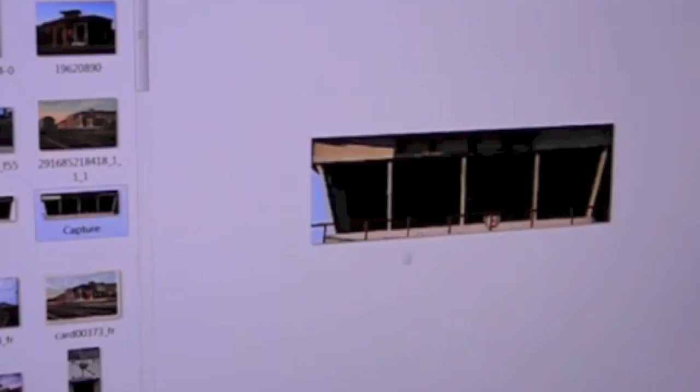And this is the original photograph. And here's one that I modified slightly using a photo edit software package, where I removed that railing.

I don't believe this is corrected yet for skew. Well, yeah, maybe it will. I think I'm shooting it on an angle here off of my camera, so it makes it look like it's not square, but it is.

And then I use this again to paste into my program to actually do the design page.

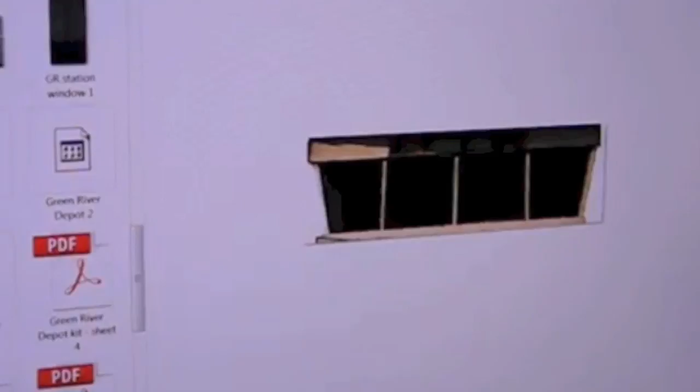Now I'm going to show you some of the pages that I designed using these components. So here I have a window, for instance, and I plugged that into my design screen.

Let's see if I can bring that up here for you. I have a program called Model Builder. It's from Evan Designs. And this is what the design screen looks like when you start out.

You tell it you want a new project, or you can open save files. You put the scale in here, in this case N scale, 1/160th.

Now I'm going to tell it to open a saved file. Okay, so I'm going to open a save file.

Saved in the Model Builder, of course. I have a lot of files in here, a lot of designs that I've done. Here's a little store that I designed, called 10 Point Bob's. I'll open that. Now this is obviously not Roy's station, but it's a much simpler building.

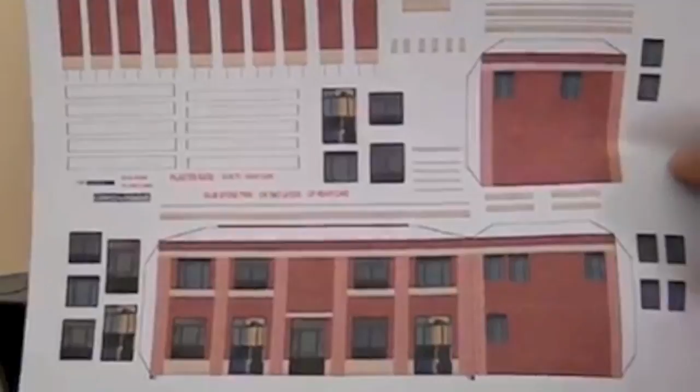This is done on just standard bond paper. You may be able to see there, those doors and windows I made from snips done from images that we downloaded off the internet. I inserted them onto my design screen so that we had doors and windows.

Right there, on top of those pilaster cover wraps, you can see that medallion I was trying to show a picture of earlier and really couldn't get it to come into focus. But that's where I used that.

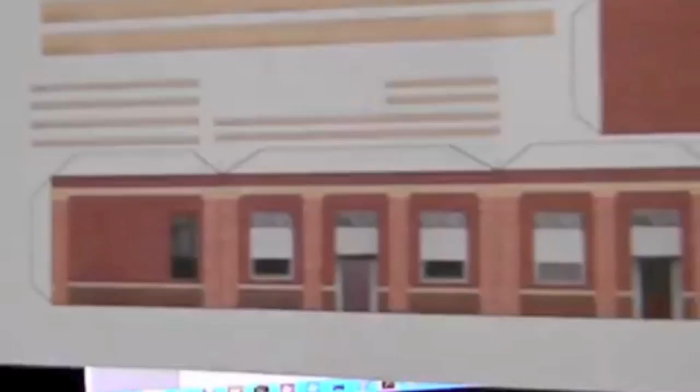This is page 2. This is actually the design for the west wing on the top, and some more pilaster wraps. And this is part of the east wing, and more of the east wing right here. So as you can see, I think that's page 2.

We'll open up page 2. Right, so this has several things on it. Like I said, this is the west wing. These are pilaster base layers right here.

What I do is I print this on a piece of cardstock, and then I take these gray colored items right here, glue them onto a heavier piece of cardboard, and that becomes the pilaster, which is then glued onto the front of the building printout. Right here, these are the pilasters, so they're actually made separately. And these are the cover wraps that go around that heavy base.

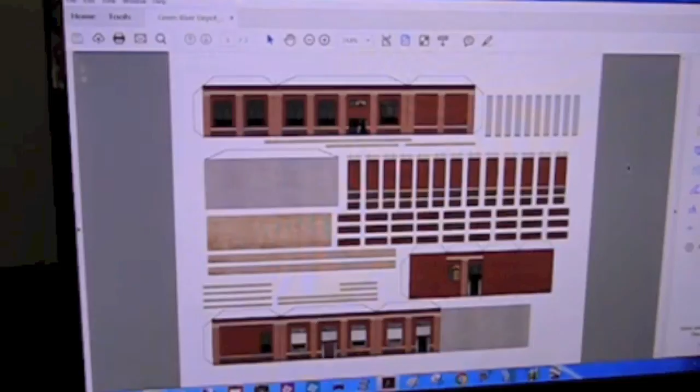I actually did a second print on regular paper rather than cardstock, and wrapped that regular paper print around the heavy base of the pilasters, and then glued that onto the front of the design.

Now let's see, this is sheet 3. This is the roof. This probably was one of the more difficult things to try to get the angles correct. This is probably about the 3rd or 4th attempt that I made trying to get this so that it looked correct. This is the main roof pieces.

And you can see here how it's angled. And then these down underneath it are the end pieces. They also have to be angled so that everything comes together in a shape of a trapezoid, more or less.

Let's see, sheet 4. These are components that I made for the top part of the station above the pillars. This is like, it's almost like a brick fence. It's tough to see this unless I increase the size somewhat.

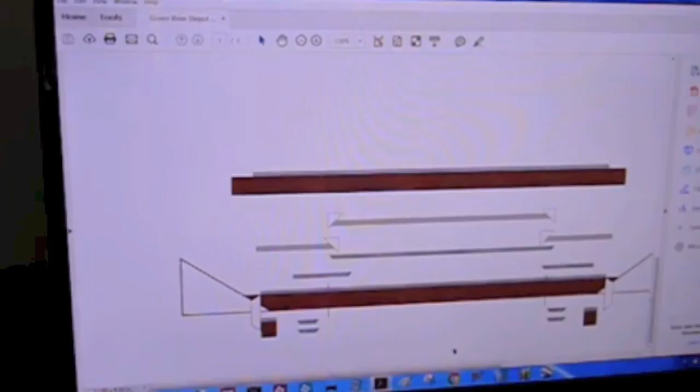There you can see that I've actually got the brick itself, and then the trim pieces that get glued over top of the brick. In most cases, this was printed on cardstock, which was then glued first to a heavier piece of cardboard before it in turn was glued onto the basic structure. So it's rather a time-consuming process, because there's a lot of cutting and gluing.

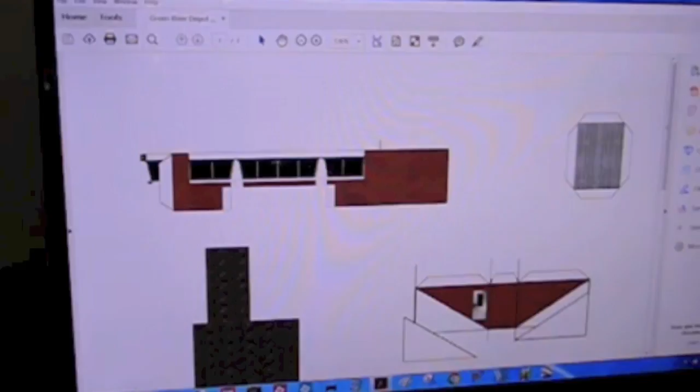This is sheet 5, and this actually shows the crow's nest portion where I put those windows in place. And oops, I don't really want that. This piece down here is the roof of the crow's nest area. Here you can see this is tapered to fit the pitch of the roof, with a door stuck in place there.

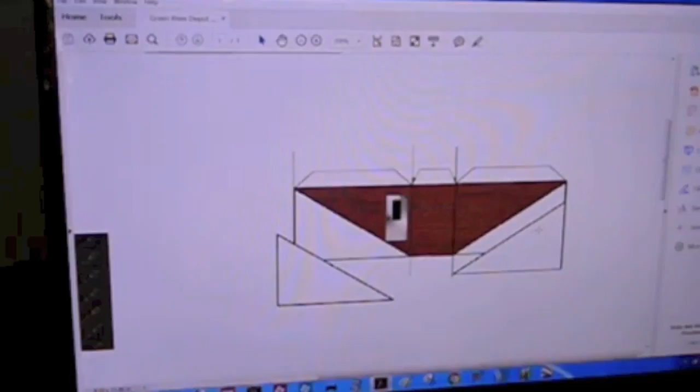So anyway, I would say probably at least 50–60% of the time I spent on making this project was done on the computer, making the designs. They're going to say, well, where did I get the brick to begin with? Okay, well, it's not something that I bought. Well, sort of it is. I used a texture from Clever Models, one of their brick textures.

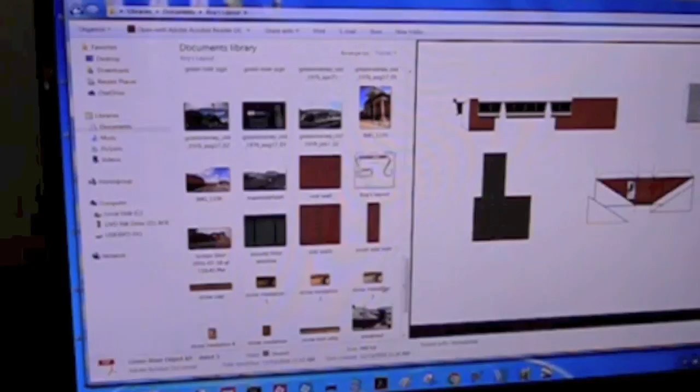This one here I made for the rear wall. So I can zoom in on here.

This was one of the Clever Models textures, but not the whole texture. What I would do is open it in a Corel paint shop program, and cut out a portion of their texture sheet to make it exactly the correct size that I needed for the rear wall. I specified the size of the crop in inches according to the size I actually wanted. And here's another piece. This is the side wall.

Okay, and this is a small side wall. Now, why did I go to this much trouble?

Well, anytime you bring an object into the Model Builder program, it is brought onto the design screen as something totally out of scale. It's much smaller, and what you have to do is enlarge it or stretch it to the actual size you need. Since I wanted to maintain the brick size and spacing, I had to specify the size I wanted for the finished wall size. Once I imported that image into the Model Builder program, I was able to stretch it to the finished size that I wanted, maintaining the correct proportions between the brick size and line spacing.